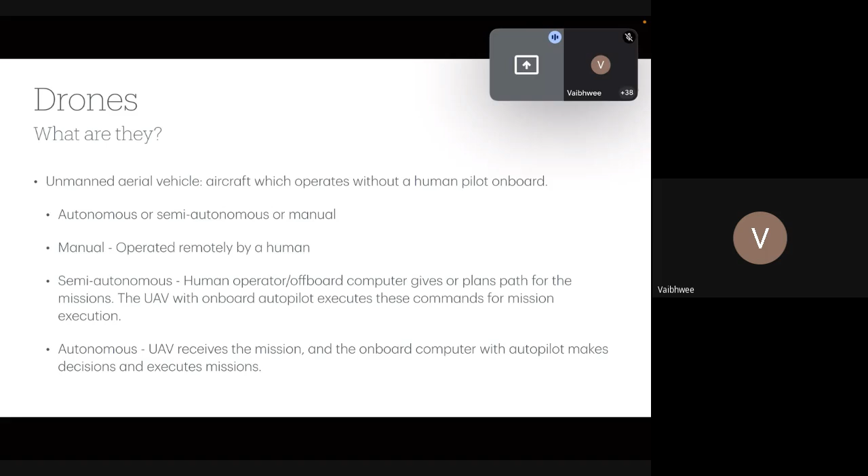So now if we classify drones, those drones are aerial vehicles. So they need to have some kind of force that actually lifts them up and keeps them afloat in air while they are moving. So depending on the surface that generates this lift, the force that basically keeps them afloat, we classify them as fixed wing unmanned aerial vehicles, rotary wing unmanned aerial vehicles, and flapping unmanned aerial vehicles. These are the three major classifications, and there are a lot of vehicles that you see in these classes.

The popular ones which are commercially available in fixed wing UAVs are the General Atomics MQ-9 Reaper. When I say commercially, I mean this is not for public use. This is basically a military drone. So the General Atomics MQ-9 Reaper that you see on the extreme left is a fixed wing drone. At the back of it, it has a propeller which is basically used to give a forward thrust to the drone so that it moves forward.

And when it moves forward at a certain velocity, because of the wing structures, it generates a lift, and this is the force that keeps it afloat. So the lift is created because of the wings which are moving at a certain speed in air. Another form of fixed wing UAV is an example which I have shown as the AeroVironment RQ-11 Raven UAV. This UAV is a small fixed wing UAV which can be hand launched.

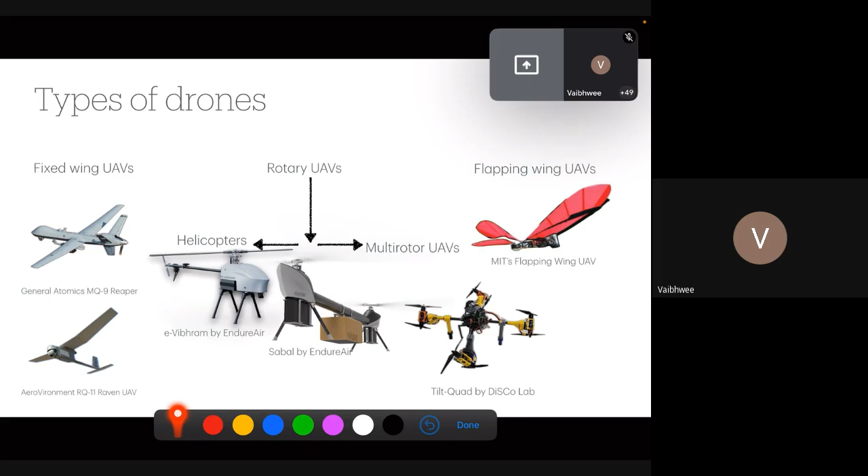Now moving forward, each of these drones needs some energy source to operate. So it is either based on gas. When I say gas, it is basically gasoline, so it can be petrol. In some cases, hobby flyers use ethanol and so on. Electric ones primarily rely on battery.

These days, there are drone setups with a hybrid kind of mechanism wherein it is actually run on fuel. So the fuel runs an electric generator set. There is an engine that drives a DC generator. This engine consumes either ethanol or petrol, and this DC generator produces the energy that is required to drive the electric motors.

So the actuation system of the drone is actually electric, but the fuel that is being supplied is either petrol or ethanol. So the engine drives the DC generator, and the power produced is used to drive the actuators and other electronics on board. So this is a hybrid system that is actually being used.

Okay, so this e-Vibhram and the quadrotor that I am showing are basically electric ones. A new type of energy source has come in. So you would have heard about the buzz going around, things turning out to be hydrogen powered. Okay, so these days you have hydrogen powered cars. You would have seen that India is soon going to test hydrogen powered trains.

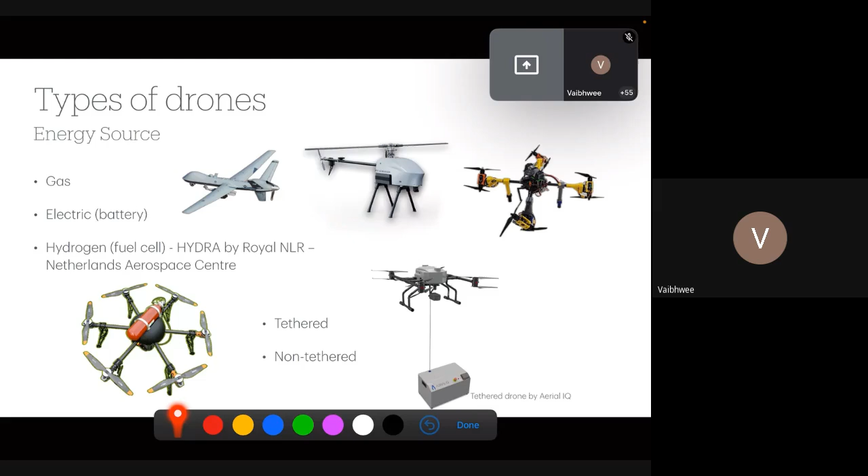Now, depending on the type of use, we have consumer drones, which is for personal use. The Amazon sale is going on now. If you search for these toy drones, it would cost you around something between 1,500 to 3,000, and it can go all the way up to 60,000-70,000 depending on the features that you're looking for. You can use it for photography, you can use it for recreation and so on.

One of the popular drones in the small form factor is the DJI Mavic. DJI Phantom is also used for photography and it is a very popular drone. Commercial drones are primarily for industry applications. They're used for surveying, monitoring, infrastructure inspections, business to business delivery or business to customer delivery. So basically point to point delivery of products.

And then you have military drones, basically drones which are specifically built for armed forces applications, which is surveillance, reconnaissance and combat. Because of this, they have additional requirements, like the components have to be military grade and they have to be stealth. The noise signatures and heat signatures should be low enough so that they cannot be detected. Because of these stringent requirements, the price of such drones is comparatively very high as compared to commercial drones.

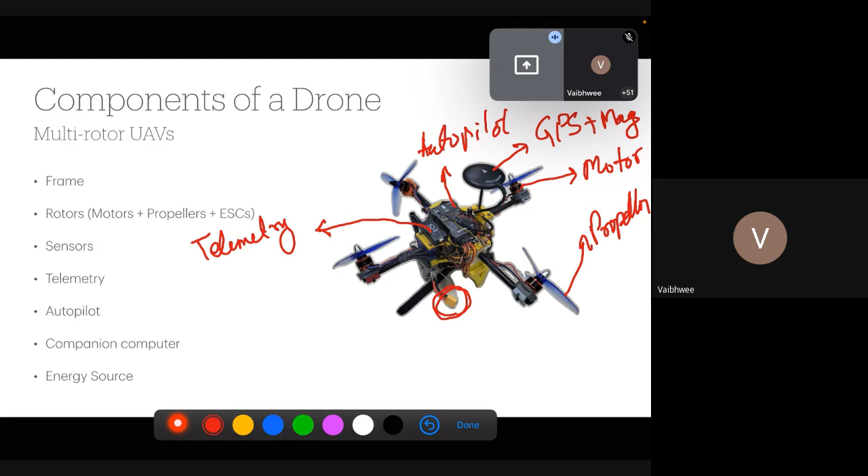Okay, so these are the primary components that we'll have. So we'll discuss these components next in detail. Okay, so the frames that are usually used for multi-rotor UAVs, the most popular one, because they are very cheap, is the glass fiber plus polyamide nylon composite. These cost something between 650 to 1,000 rupees. These are composite frames with the mounting plates being basically PCBs, where you can install your ESCs, route your ESCs and the battery connections through them.

These are lightweight. The figure that I have shown is for a 450 mm frame. Now, when I say 450, it's basically from the propeller's motor center to motor center, diagonally opposite. Okay. Then you have carbon fiber composite frames, where the entire body is made of carbon fiber. So here the arms that you see are essentially of carbon fiber, along with the base plates and other mounting plates. They're all carbon fiber made.

You have frames which are 3D printed, so the entire frame is 3D printed. So these days, to make drones light, you have 4D printed frames. So when I say 4D printed, what it essentially has is basically you have 3D printed plates. Along with that, there are PCB layers which are also printed. Okay, so you embed the PCB on the frame itself, which becomes one structure.

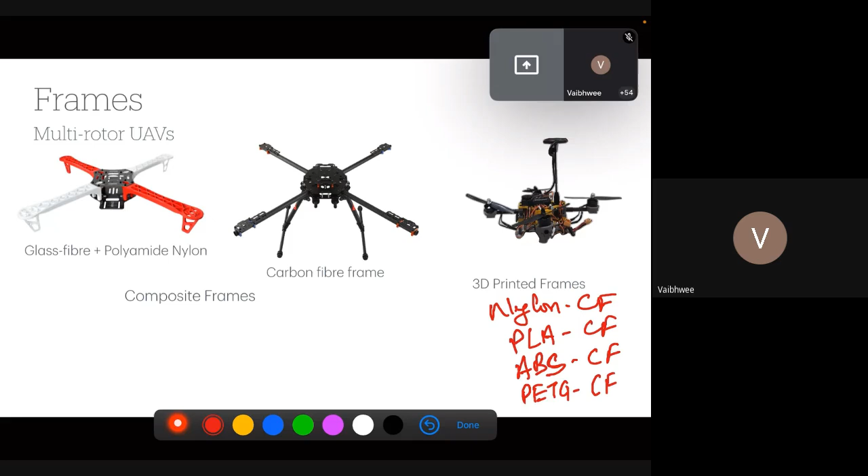Okay, motors and propellers, they are usually dependent on what is your desired all-up weight. The size, the power requirement of the motors, the size of the propellers, they all depend on the all-up weight, because you need to know what is the amount of thrust that you need so as to fly your drones. Okay, the motors that are used in drones are brushless DC motors.

Why brushless DC motors? Because these motors run at very high speeds, and these motors are easy to control. Their response time is fast. And in brushed motors at very high speeds, the brushes basically wear off. Okay, which is not a problem in brushless DC motors. Okay, now there are two types of brushless DC motors that are used: the outrunners and inrunners.

Of these, outrunners are pretty popular, and if you see a motor, usually the motor ratings would be based on something known as a kV rating. You would see motors written as 1000 kV or 2200 kV or 480 kV and so on.

So that kV rating essentially means how much RPM you are going to get out of the motor for every volt supplied. So 480 kV means it is 480 RPM for every volt. So if you give a 10 volt supply to the motor, it is going to have an RPM of 4,800. Similarly, a 2200 kV motor is going to have 22,000 RPM for 10 volts supplied to it.

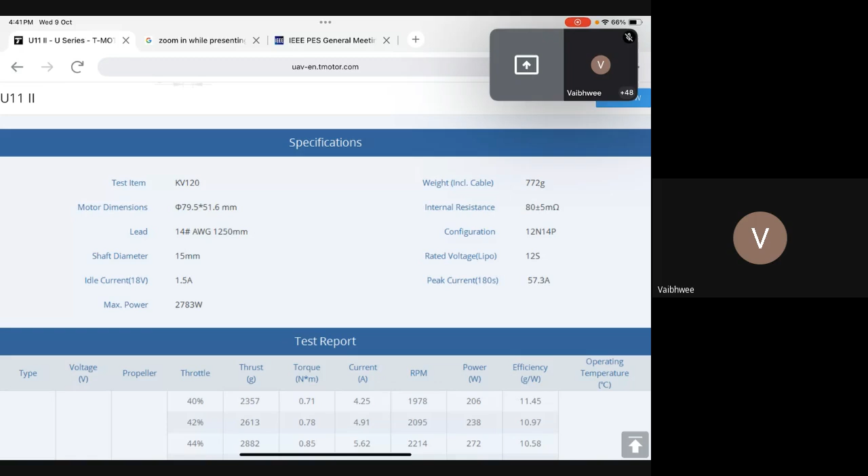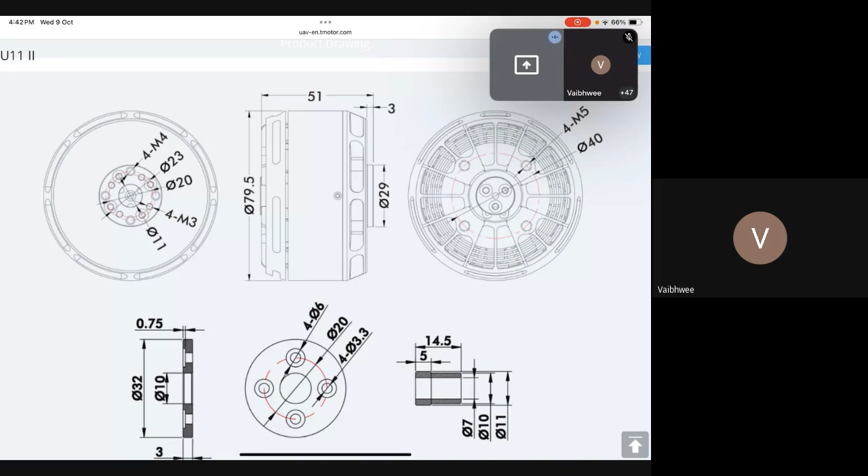I'll show you a typical motor rating. Let me see, sorry, not this. Yes. This is a typical motor rating for a T-Motor. If you go to any good motor seller or brand, this is basically a T-Motor, a Chinese company though. This is a U11 version 2 motor. You would see the CAD drawing, which tells you everything about the mounting points of the motor. This is important when you custom make your own frames, and when you choose the motor, this is something you want to look at.

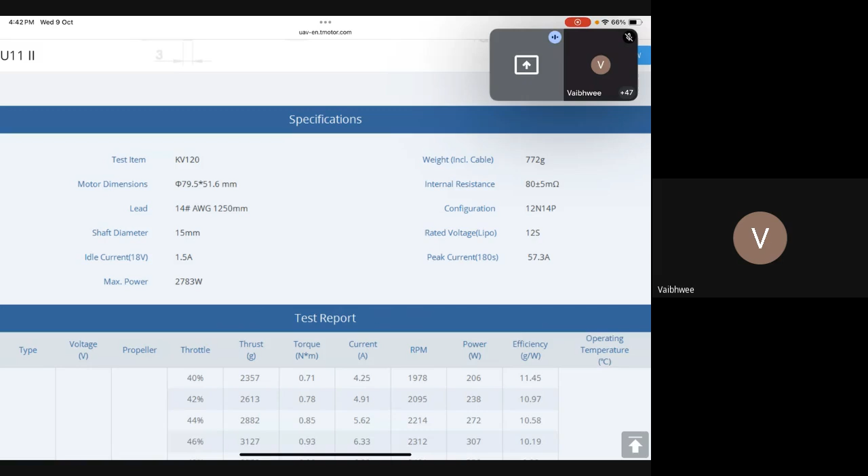When the motor was tested under lab conditions, it was found to have around a KV120 rating, which means it gives 120 RPM for every volt supplied, and the motor weight is 772 grams. Now the lead that you see is a 14 AWG wire; this is the wire acting as the motor terminals. Then the configuration is 12N14P. If you have seen motor configurations, you usually have stator poles and rotor or magnetic poles. So 14P means there are 14 magnetic poles, or 7 pairs of poles.

And 12N, which means there are 12 stator slots. Now typically BLDCs are 3-phase motors, so 12 slots, 3 phases, which means 4 slots per phase. Then of course there is a shaft dia. The idle current at 18 volts is 1.5 amperes, which means if you just connect the motor and the motor is not running, it will still draw 1.5 amperes.

And the rated voltage, the maximum that you can connect, is a 12S LiPo. So 12S LiPo roughly corresponds to 48 volts, and the peak current that it can draw is 57.3 amperes up to 180 seconds. Okay, 180 seconds is 3 minutes. So up till 3 minutes it can draw 57.3 amperes, beyond which it will burn out. Okay, and the maximum power that it can give is 2783 watts. So this maximum power is again for this 180 seconds.

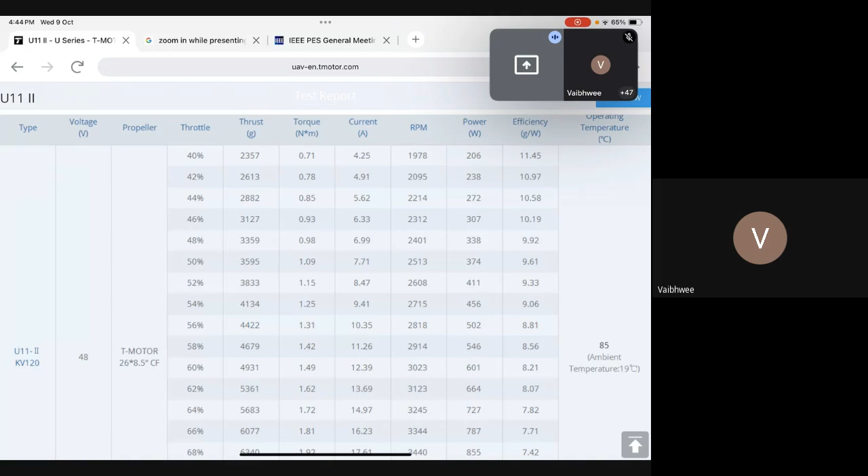And then you have the throttle rating. So for example, at 50% throttle, it is able to generate a thrust of 3.5 kgs roughly. Okay. The torque that it is experiencing is 1.09, where you have an efficiency of 9.61. For every watt consumed, it is able to generate 9.6 grams of thrust. So this table essentially helps you in deciding what kind of motor propeller combination you can use.

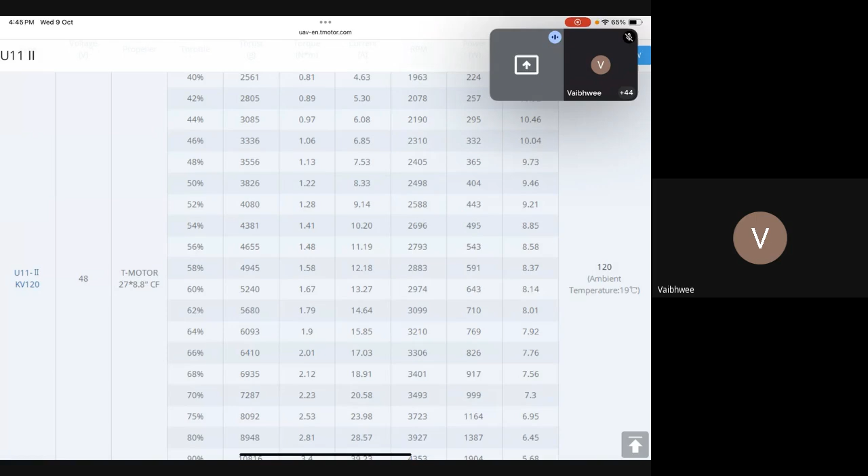So they have given another for the same motor at the same voltage for a different propeller. Here the propeller size has increased by 1 inch and the pitch has also increased by 0.3 inches. And again, if you see at 50%, that was giving around 3.6, this is giving around 3.8 kgs of thrust, but the efficiency, you see, has gone down slightly. So this is something that one should actually look into.

So usually the manufacturers, if they have their own propellers, well and good. If not, you can basically look into such test tables and figure out what kind of propellers would go. The reason being that these are the most efficient possible combinations that one has. Okay, this is an exploded view of the same motor that we were discussing. And these are the propellers.

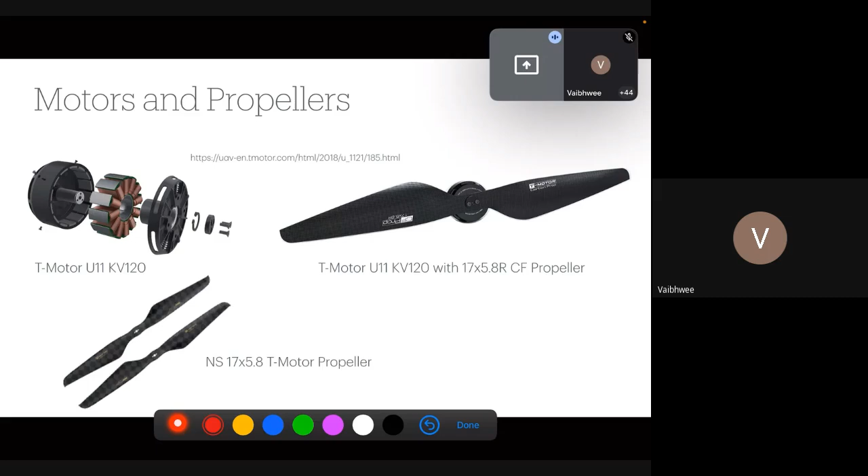So propellers, usually in case of multi-rotors, the number of counterclockwise propellers is the same as the number of clockwise propellers, so as to counter the drag effect that is generated by one propeller with respect to the other. Okay. Now these are interfaced with electronic speed controllers. This is again a T-Motor example that I have, and the electronic speed controllers have these specifications as shown.

Basically, what is the voltage level that can be applied, whether it has a battery eliminator circuit with it or not. So meaning, can you tap 5 volts to 11 volts from it or not? What is the peak current that it can supply and for how much time? So this one can supply a peak current of 60 for only a duration of 10 seconds, beyond which it will burn out, but it can supply a current of 40 amperes continuously. Okay. And then the throttle refresh frequency of 500 hertz with a throttle response speed of 120 milliseconds.

If you change the throttle, it takes 120 milliseconds to respond and change the voltage levels that are appearing across the motor. Okay. So typically what you have are these three terminals, which are the motor terminals that go to the motor. This is a heat sink inside which the entire electronics, basically the controller, the gate drivers and the MOSFETs are there. This cable that you see at the center is the signal cable and also the programming cable.

And then you have the positive terminal and the negative terminal which get connected to the power source, which is typically a battery. The signal cables get connected to the autopilot, and the autopilot is the one which generates PWM signals. So the PWM signals come into this controller inside, which accordingly drives the MOSFETs to change the voltage profile that appears across these three orange leads that you see. Okay.

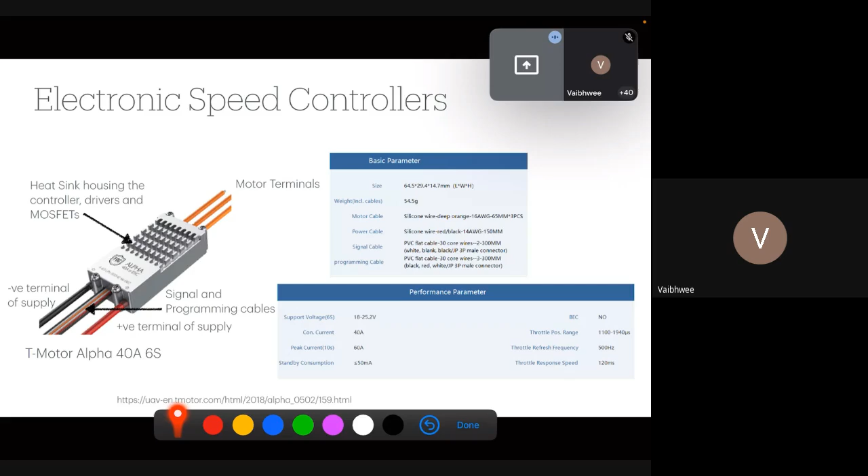Now the sensors that typically go in these, the first one, or the main important one, which you would see invariably in any unmanned vehicle, is the inertial measurement unit. Typically, we use 9 DOF IMUs. Why 9 DOF? So they have a 3 DOF accelerometer, 3 DOF gyro, and 3 DOF magnetometer. Okay.

How much time do I have now?

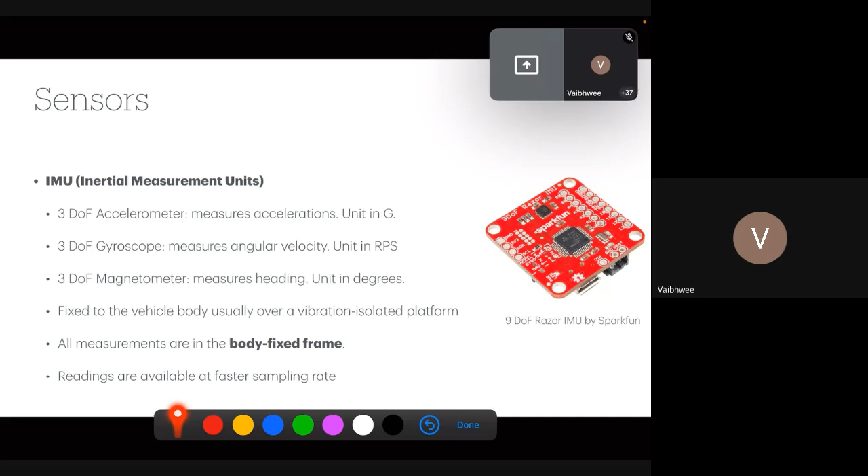Okay. So you can go ahead. We have enough, 1 hour or more.

Okay. So the accelerometer output is usually in terms of G. 1 G is basically 9.8 meters per second squared. And when I say 3 DOF, it means it can measure the acceleration along 3 axes: the x-axis, y-axis, and the z-axis. Similarly, you have a 3D rate gyro. The 3D rate gyro gives angular rates along all the 3 axes, usually in terms of radians per second. At times, the output is in terms of degrees per second.

And then you have a 3-axis magnetometer, which gives you output in terms of degrees with respect to the x, y, and z-axis. Now this sensor is fixed through a vibration isolation platform onto the vehicle. Once it is fixed to the vehicle, the measurements that are going to come are always going to be with respect to the vehicle. So whatever you see is always with respect to the vehicle, and when we talk of controllers, we have to do suitable transformations, and the output of these is fast.

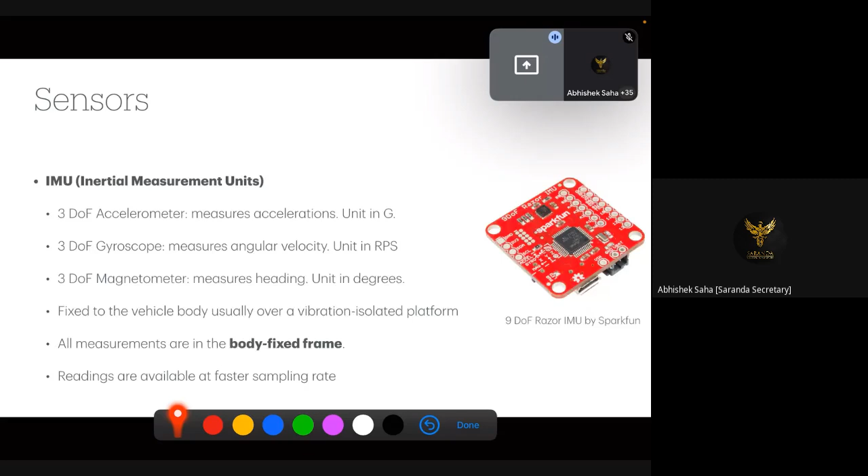So we sample them at a very high rate. Towards the end, we'll see what the typical sample rates are that we use. So the data can be collected at a very high rate. Along with this, we use a GPS module. GPS, as you know, is the global positioning system, which gives you the absolute position of the vehicle. This output is usually in terms of lat and long, so latitude and longitude.

But if you want it in terms of meters, when the vehicle initiates, the autopilot software, wherever it gets its first GPS fix or first GPS lock, puts that latitude and longitude as the home position, and whenever it starts moving around, from that point it calculates the relative position in terms of meters. So the point where the first GPS fix happens is known as the home position, which becomes the origin now.

So this home position becomes the origin for what we call the earth fixed frame or the inertial frame. This frame is fixed with respect to the earth, and as the vehicle moves, you start getting information in meters for the XYZ position. Now, typically, the update rates of GPS are pretty slow. The cheap ones have an update rate of 1 hertz. So every 1 second you get information about the position, and from that you can also estimate the velocity.

You have a barometer. A barometer, as you know, measures the pressure difference with respect to the mean sea level, and the output is usually in terms of bar. With a suitable calculation, you can convert this bar to height with respect to the mean sea level, so you get your values in meters. Again, the sampling rates of barometers are comparatively faster.

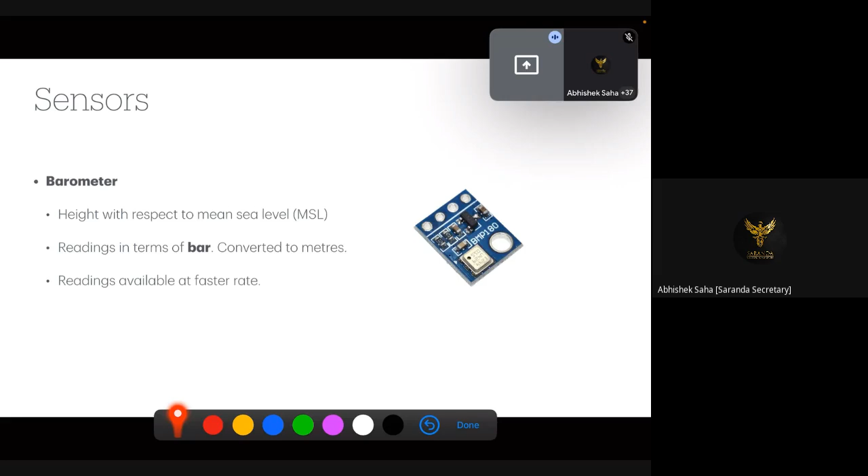Now these sensors that I mentioned do not need a lot of processing. They have small processing units on board, and their output can be directly fed to autopilots, which are low level computers. The sensors that I will talk of now, the LiDARs and the cameras, need a good amount of processing. They have a lot of information, so they need a good amount of processing, and they cannot be processed by the autopilot.

So LiDARs, again, are fixed to the body of the vehicle, and hence all the readings are with respect to the coordinate frame associated with the body. Now there are 3 types of LiDAR. 1D LiDAR, which is basically point LiDAR, just gives the distance to the object where it hits. Then you have a 2D LiDAR, which scans on a plane and generates point clouds on the plane.

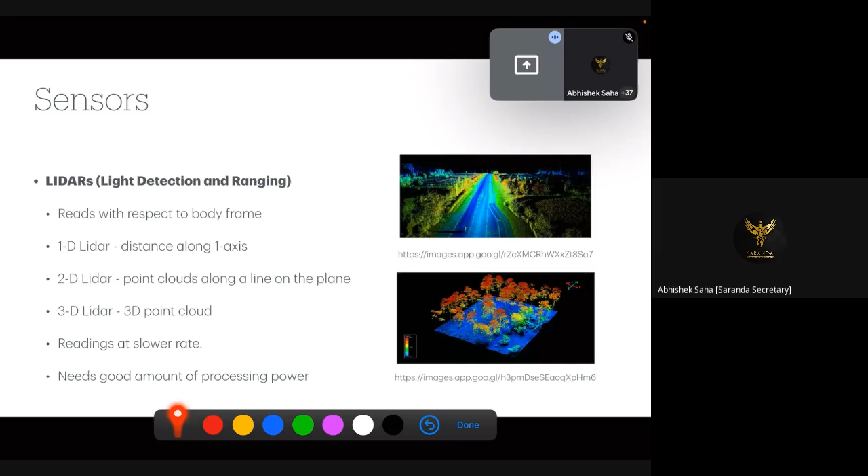And then you have 3D LiDAR, which generates point clouds in 3D space. If you see the images on the right, with 3D LiDARs you can almost see the 3D structure of the environment. They have a slower rate and they need good processing power. Another sensor which is very popularly used is cameras. They can be RGB cameras, infrared, or EOIR cameras.

EOIR cameras are popularly used for military applications or any other applications where you need infrared information along with RGB information. So they are used for navigating the drone either manually or autonomously. When you do it manually, you basically see the live stream of the camera and do it. So what you basically see is the first person view, as if you are sitting in the UAV while maneuvering it. So you have FPV cameras which transmit the videos to a remote station from where a pilot controls it.

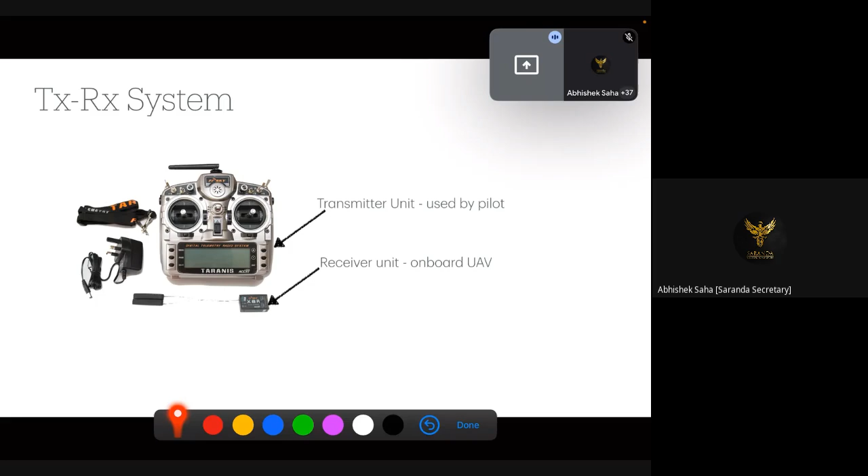Then the next important part is the transmit receive unit. So this is what a pilot typically has. So even if a vehicle flies in autonomous mode, there is always a manual override present, and the pilot is always there with its control units. So when a UAV has some problem executing some autonomous missions, it can take over the UAV and bring it back home. Okay, and this is the typical receiver unit that is used. I mean, this is what we are using at least in our drones, and it has a good range of a few hundred meters for test purposes.

Now, the main thing that we have is the autopilot, which is the main brain of the unmanned aerial vehicle. It processes all the sensor signals, command signals, and messages. It generates the control signals and then transmits the same to the actuators, which essentially are driving the UAVs. Okay. Now, these autopilots can be basically just processing boards which gather information from all sensors which are not associated with it, or the autopilot boards like the one that you see here in the figure are the ones which carry sensors on board them. So the sensors are integrated.

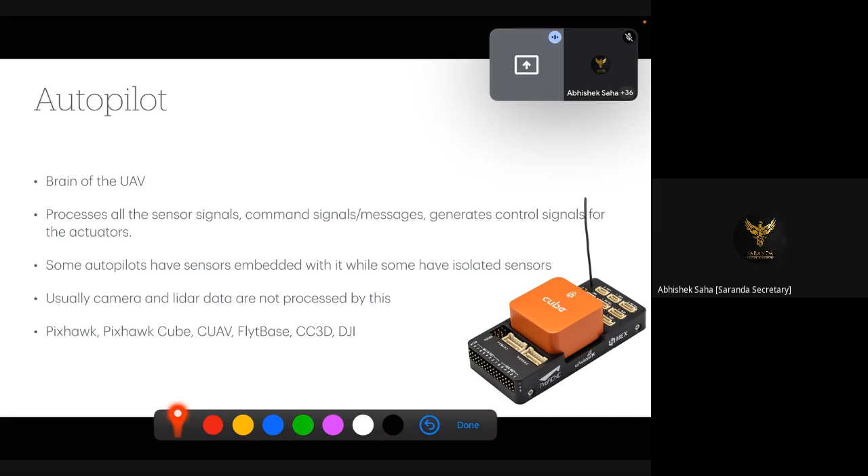But camera and LiDAR are something whose data cannot be processed by these. So typical examples are Pixhawk, Pixhawk Cube, the one that you see here is the Pixhawk Cube. You have CUAV, you have FlytBase, CC3D, you have autopilots from DJI and so on. Now to process LiDAR information or camera information and run, for example, complicated path planning algorithms, or if you want to run a neural network, then you need something known as a companion computer.

These computers are not real-time computers. So autopilots run a real-time OS, whereas companion computers need not run a real-time OS. They usually run embedded Linux or the usual Linux that we use on our systems, to which these LiDARs and cameras are integrated. And typically they have more processing power as compared to the autopilot. So depending on how much processing you need, you can choose your boards. RPi 5 is a very popular one because these are cheap, but they have low processing power, but more than enough compared to the autopilot board.

The next one is the Jetson Nano. On top of it, you have Jetson Orin, which has better processing, and then you have Jetson TX2 boards, which have faster processing and can handle LiDAR data as well. But again, please note that as the processing or the computation power increases, the power consumption by such boards also increases. So when you account for your batteries, you not only account for the motors that are going to drive them, but also for the sensors and the computers on board as well.

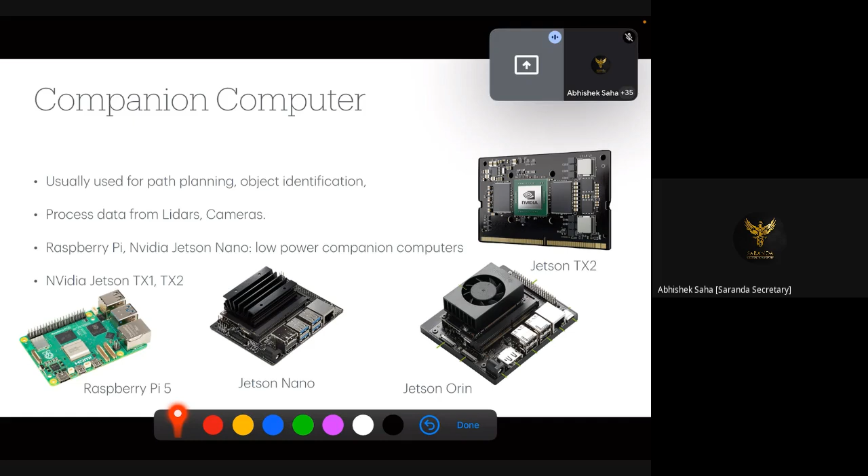Now with all these sensors and all, before we start constructing the controller, we need to model. Okay, so this modeling is usually done on the basis of first principles. These are physics-based models, and for miniature UAVs, we can assume that they are rigid bodies capable of both translation and rotation while under the effect of gravity. And when we model this, we need to associate frames. There are three main frames that are used.

The first frame is the earth fixed frame. So there are two types of earth fixed frames that are used. One is the NED frame: x-axis along the north, y-axis along the east, and the z-axis points down towards the center of the earth. Whereas the other type of earth fixed frame is the ENU frame, where east means the x-axis, north means the y-axis, and up means the z-axis.

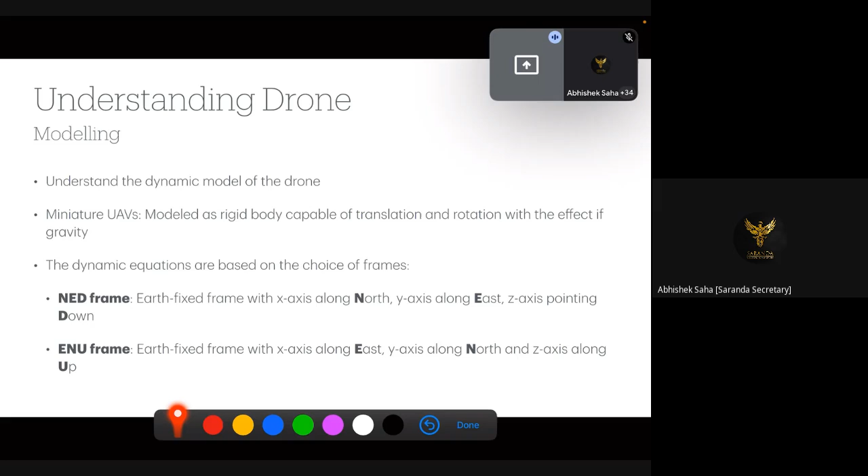The popular choice that is usually used in any of the autopilots is with respect to the NED frame. Now, this frame, as I said, has the origin where the home position is marked, where the first GPS fix is attained.

The next frame is a frame which is on the vehicle, and typically the coordinate frame has the origin on the center of gravity of the vehicle. This is a frame which remains parallel to the earth fixed frame. So whether you choose a NED or an ENU, it remains parallel to that frame, and that frame is fixed. Basically it's a frame that has the origin at COG, basically the NED frame or the ENU frame translated to the vehicle. So this frame keeps on moving with the vehicle, but remains parallel to the earth fixed frame.

And then you have a body fixed frame. In the body fixed frame, typically the forward motion direction of the UAV is considered as the x-axis. If you take the right hand side of the UAV to be the y-axis, then the positive z-axis is vertically down, meaning perpendicular to the xy plane of the body. If you take the y-axis to be the left of the vehicle, then the positive z-axis is perpendicularly up. It is perpendicular to the xy plane of the body.

So the x-axis remains fixed. The x-axis is always in the forward direction of the vehicle. Now, depending on whether you choose the z-axis to be up or down, you will have the y-axis either to the left or to the right. Similarly, if you choose your y-axis to be right or left, the z-axis will be down or up accordingly.

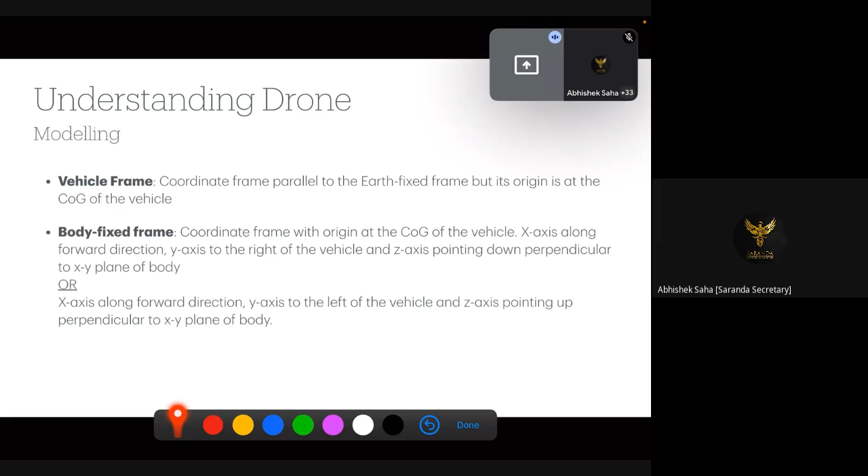Once we have established this notion of frames, we define the attitude of the vehicle as the orientation difference between the body fixed frame and the vehicle frame. With these two frames' orientation defined with respect to each other, we can transform forces in one frame to the other frame and write down our force balance or moment balance equations. That is what forms the dynamics of the UAV. So that is why understanding these frames is very essential.

Now, the attitude of the vehicle is the main thing. We either denote it by Euler angles, in case of UAVs a ZYX rotation from vehicle frame to the body frame, or through unit quaternions or rotation matrices. Euler angles have their problems because of singularity at certain configurations. For example, when the vehicle has its nose up, so the forward direction is pointing exactly up, you cannot distinguish between yaw and roll, which gets taken care of when you use unit quaternions and rotation matrices.

Rotation matrices do not have any singularity, which means that every rotation matrix depicts a unique orientation between the vehicle frame and the body frame. So these days you would see controllers designed with rotation matrices, and to ease things up, people also design controllers using unit quaternions. The Euler angle concept is not being used much, only for flights which are not highly maneuverable. Now, once you have understood your frames and the dynamics, you know your measurements are available.

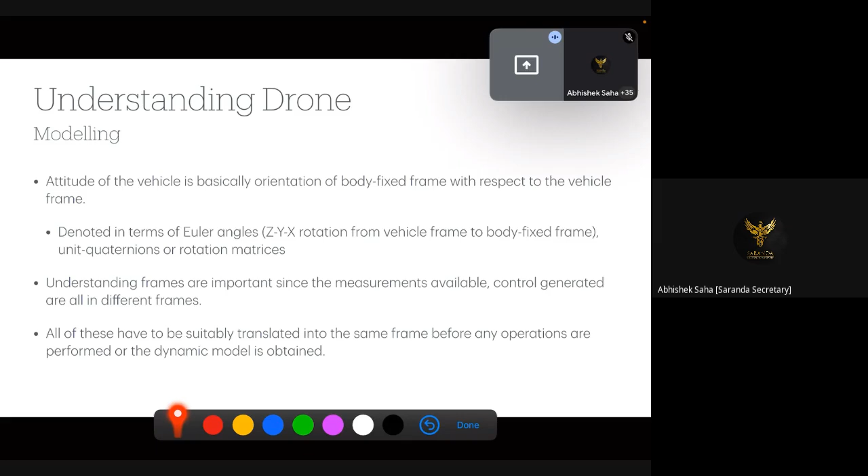Now you generate your controllers. You generate your control inputs, and please note that these control inputs that you generate are always in the body frame. Why? Because the actuators are fixed to the body. So whatever forces and moments you are talking of are always with respect to the body frame. So that is why you need to understand this orientation between the vehicle and the body frame. So with suitable transformations, you can write the force balance equations.

Now, once you have the physical system and you have come up with the dynamic model using the first principles, now this dynamic model is very complicated. It accounts for almost everything that you can have for the UAV. But these are very complicated, higher order ODEs, and they have non-linearities. So designing controllers around these becomes difficult. So what we do is we simplify these models around operating points.

For example, let's say a quad rotor is going to move, but it is not highly maneuverable, which means the attitude changes won't be much, which means the attitudes would remain within 0 to let's say 30 degrees for roll, 0 to 30 degrees for pitch, and the yaw angle would not vary much. Usually the nonlinearity comes from the roll and pitch angles. Now, if you assume that these angles are going to be restricted within -30 to +30, then small angle approximations can be used. So sin theta can be approximated as theta, cos theta can be approximated as 1, and so on.

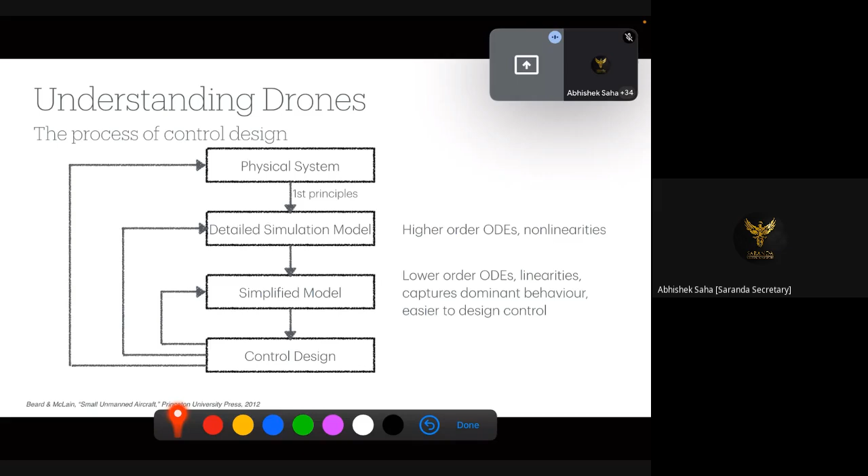Now notice that these approximations are being done about these operating points. You know that the operation range is this, and hence you simplify the model. When you simplify the model, you end up with lower order differential equations, and in some cases you end up with decoupled equations, which means a big system can now be considered as sets of smaller subsystems. Now with this small subsystem in hand, you design the controllers.

Now the simplified models are used to design the controller. Once we have designed the controller, we put it back in the simulation and see whether the simplified model is responding as it is supposed to respond. That's the first step in any control design. Once we have a satisfactory response from the simplified model, then we go to the detailed simulation model, basically the entire dynamic model, because that represents the physical vehicle. We use the controller and run the simulation with the detailed model, observe the output and tune the controller accordingly.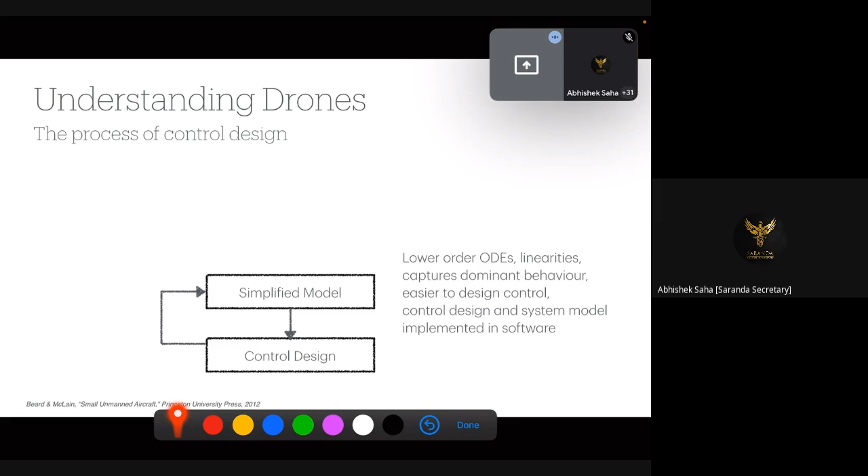Once the performance is fine, the next step is to integrate this control with the physical system. The physical system is the hardware, and the controller goes on to the autopilot board as software. So unlike the previous two cases, where the simplified model or the detailed simulation model and the controller were in software, here the physical system is the hardware and the controller is the software. So the hardware and software start interacting, and this is where we do the last tunings for achieving the desired performance. So this is how a control is designed.

Now this control has an architecture to it. This is the hierarchy. You have the physical UAV, which has sensors on board that generate estimates about the state of the vehicle: what is the attitude of the vehicle, where the vehicle is, the rate at which the attitude is changing, the velocity of the vehicle, where the vehicle is going to head, the health of the vehicle, and so on. All these states go on to every stage of the hierarchy.

The UAV is primarily flown by the autopilot. The autopilot generates commands for the actuators, which we call servo commands, and these commands help in maneuvering the UAV. Now there is a boss that sits on top of the autopilot. Once the autopilot generates these commands, the UAV responds, and the state estimator gives the measurements. The autopilot compares these measurements with whatever command it had got and generates errors, which are basically position errors. So what are the commands that have come to the autopilot?

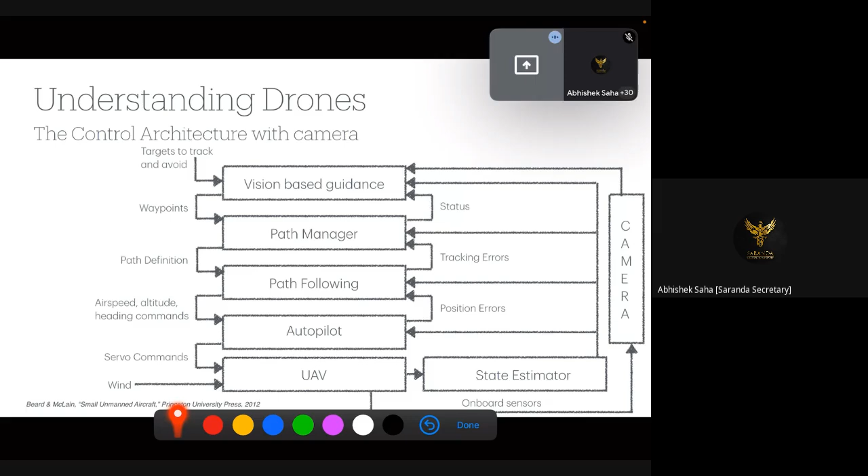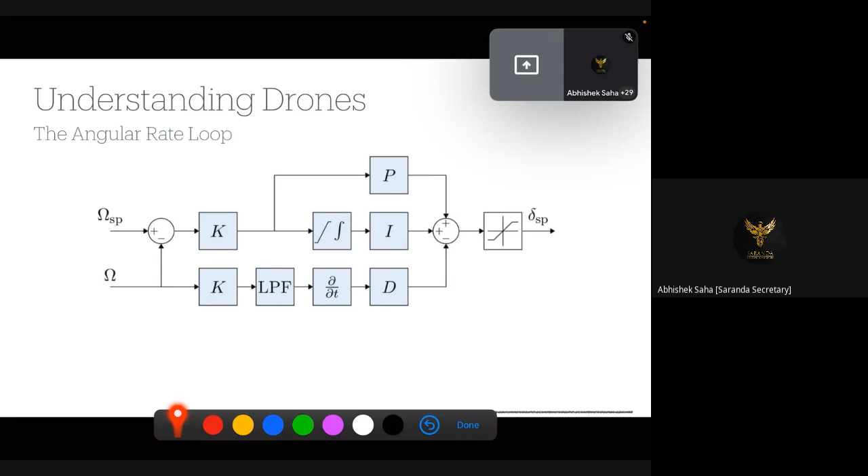So an example of the angular rate loop: you have the set point, you have the actual angular speed. This is basically the derivative controller. This is the proportional part, and this is the integral part, which together go through a saturator to generate the moments, attitude moments.

So the similar structure is actually followed for position and velocity control as well. So you have your desired position compared with actual position, which generates the velocity set point. And the velocity set point compared with the actual velocity gives you the acceleration set points. Okay. Now, so this is all that I have.

But just to emphasize what is new in such areas: this entire structure that you are seeing, people are of course attempting to realize it using neural networks or deep learning tools. The only problem with deep learning tools or neural networks is whatever you have on board has to have good computation power. At least that is what I believe. So I think deep learning tools can be very well used for decision making, basically higher order in the architecture, which is path planning and path managing.

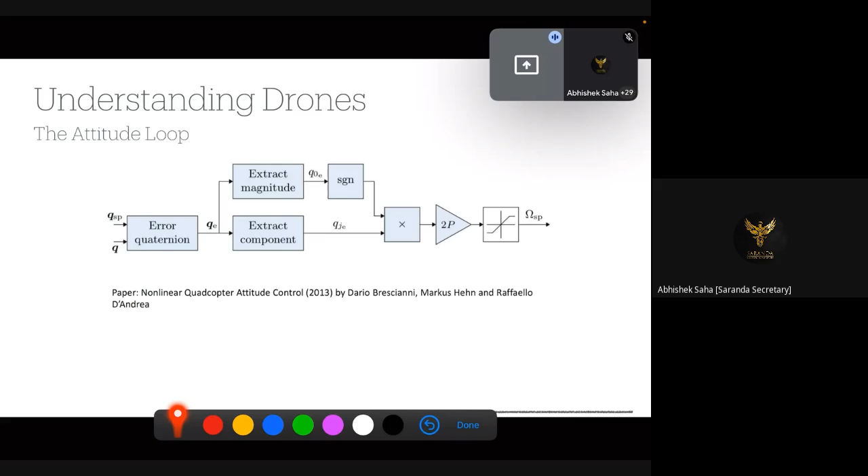But we have a lot of established literature with experiments, of course, where they have shown that deep learning can also be used to run low-level controllers, which are the attitude controls and the position control. They're really interesting work. One of them actually demonstrates that a neural network trained racing drone can beat the best human drone racer in the world.